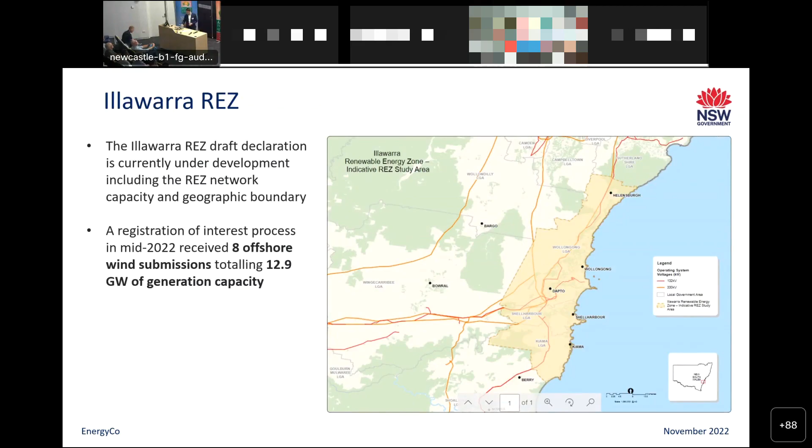So this slide is all about why I'm saying the Hunter and the Illawarra are ideal for offshore wind, really delving into why that is the case. You can see there are a few points here. There are renewable energy zones in both regions, and I'll delve into that a little bit deeper in a moment as to why that's a beneficial thing.

There's proximity to high voltage connection points. Richard will delve a little bit more into this in his presentation, but essentially you need those high voltage connection points to connect projects of this scale.

There are deep water ports here. That's really, really important when you think about the assembly of these projects, the construction of these projects, and how that works.

This goes for the Illawarra, but it's probably a bit more applicable for the Hunter. There's an existing skilled workforce here that needs to transition away from carbon intensive industries to new industries, and offshore wind is one of those things that could actually produce thousands of jobs. There's the potential there, even for a single project during construction, to produce thousands of jobs. So that's a really important point to make.

And just finally, the last point there circles back to what it is to be in a renewable energy zone. I won't go into that because I don't really have enough time, but essentially renewable energy projects that connect within renewable energy zones have a number of benefits. It's easier for them to actually access the grid, there are some financial support mechanisms there, and potentially some shared connection assets as well.

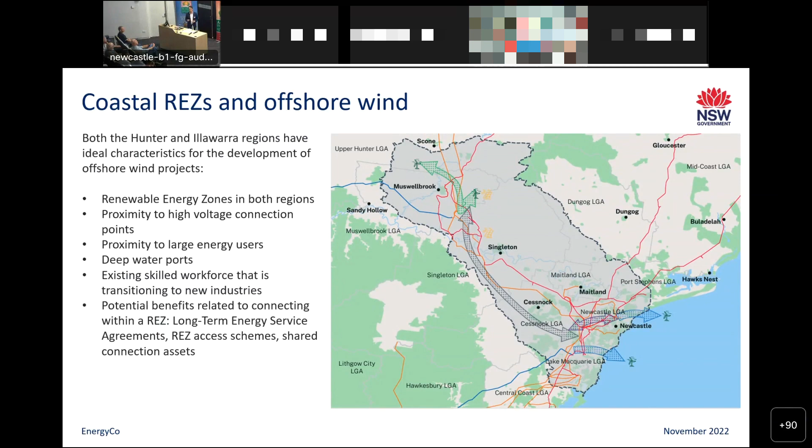So we know why these regions are ideal for offshore wind, but why is this good for us as a state? Why is this good for us as consumers of electricity?

The top point here, I find that wording a bit hard to understand, but leveraging high capacity offshore wind resources with time diversity. Essentially, the way I'd explain that is when the wind's blowing offshore and producing power for a theoretical offshore wind plant, it's not necessarily blowing onshore, and vice versa. So they produce energy at different times, and that's really, really important when you have lots of different intermittent sources of energy. Obviously solar is part of that as well.

Consumer price benefits due to greater resource diversity. Obviously, the core of any program to replace coal-fired generation is to deliver cheap energy for everybody. That's not only important for homes, but it's really important for businesses as well. If we have more diversity, we need less storage—that's basically what it comes down to. If we have energy producing at different times of the day, we don't need to overspend on a lot of storage, which is a very expensive part of the energy transition.

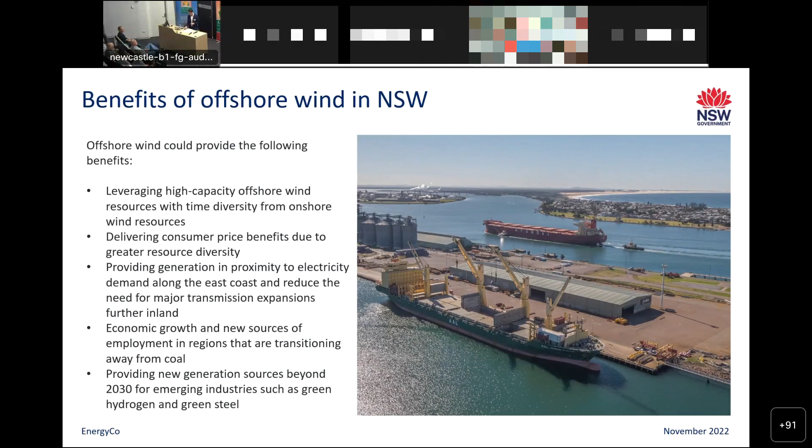This is the legislation section, so I'll try to make this as quick as possible. The piece of legislation that will actually allow these projects to be built is called the Offshore Electricity Infrastructure Act 2021. It's a bit of a mouthful.

That was passed last year, and now the federal government is in a process of identifying areas or zones in which the turbines can be constructed. So it's quite similar to the process with a renewable energy zone: you identify an area where projects can be built, and then developers can apply for licenses within that area.

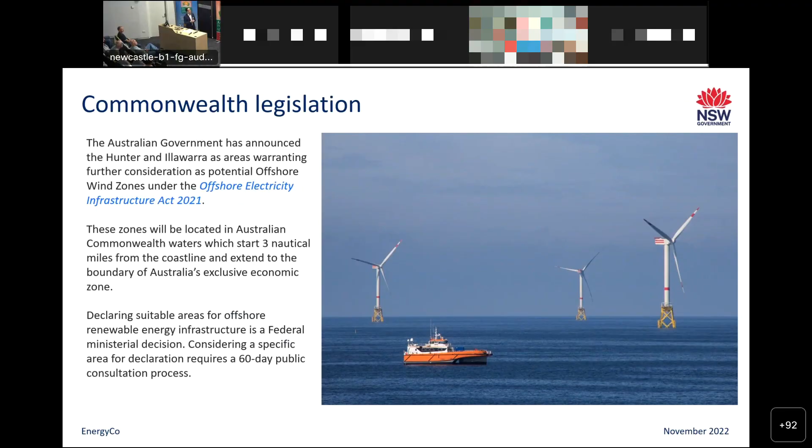I guess the only other thing to say is that's a federal ministerial decision. At the moment, that's Chris Bowen, so that would be sitting under his portfolio. And there needs to be a 60-day public consultation before any declaration takes place.

This is a very dense slide, so apologies for that, and it's a pretty intense flow diagram there on the right. I won't say much about this, and these slides will be sent around later, so you can delve into this if you're really into legislation and regulations. But the important part I'll use...

Essentially, when developers apply for licenses within this area, there'll be an assessment of the technical capability, financial capability, and suitability of a project. So projects will have to go through a competitive process to be allocated a license. And that all sits with the federal government, as these turbines are installed in Commonwealth waters.

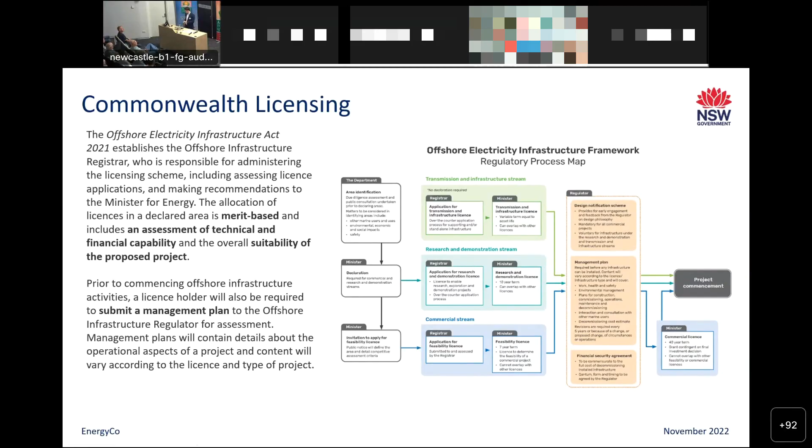Just very quickly, I wanted to touch on Victoria. They've been fairly quick out of the gates with offshore wind, and some of you might have heard about the Star of the South project. That's essentially the front runner across the country in terms of offshore wind.

Victoria released a policy directions paper in March of this year - that's where the snaps come from on the right. They set targets and identified zones where offshore wind was likely to take place. They've looked at some fairly large numbers: 2 gigawatts by 2032, 4 gigawatts by 2035, and 9 gigawatts by 2040.

So really big aspirational targets by Victoria, looking at some of those zones. They then followed that up with probably the more interesting document, an implementation statement, in October - so that's quite recent.

That actually took a step down in terms of detail, looking at what the government needs to do to facilitate these projects. So they've set the big aspirational target, and this implementation statement looks at more of the nitty-gritty detail. That's why I say it's a bit more interesting.

There's a number of things there, but I think the most important are the top two. Victoria has chosen to go with the government having a role in coordinating transmission - meaning high voltage lines coming onshore and connecting to the grid. That can be a very difficult and contentious process, with a lot of impacts on communities onshore.

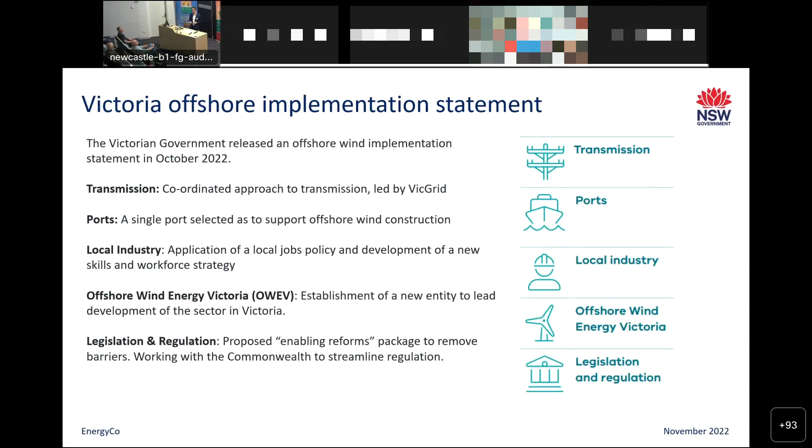Victoria is likely to have mostly fixed bottom offshore wind turbines. That means they're literally fixed into the seabed at relatively shallow water depths. That kind of technology is pretty well proven worldwide and has been rolled out extensively in the North Sea and other areas in Europe.

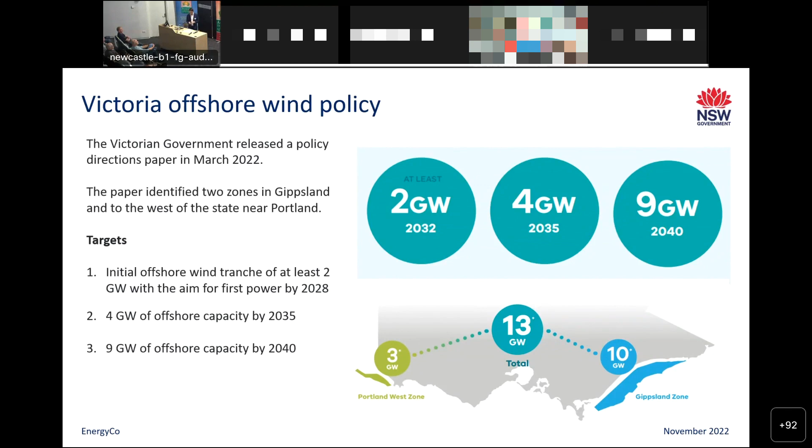Let's see if this works. Essentially this is a video of an offshore wind installation in Europe. There's not a huge amount of operational floating offshore wind projects out there, and this is one. This video, and Richard's got a few as well, shows you the scale of these projects - remember this is a few turbines, but a single project here in Newcastle could have 50, 100, even more turbines. So just think about the multiplying effect there.

I might turn the music down because it's a bit...

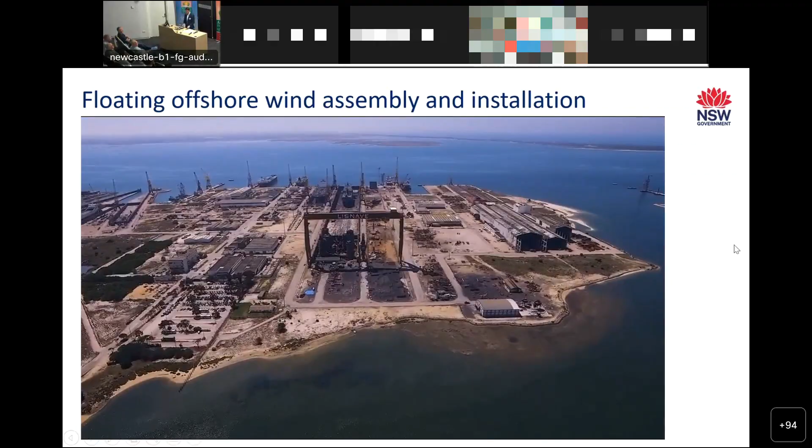Skip past all this. This is a new way of generating energy and an important step to fight against climate change. Portugal enters a new era with an internationally acclaimed solution in the production of offshore renewable energy.

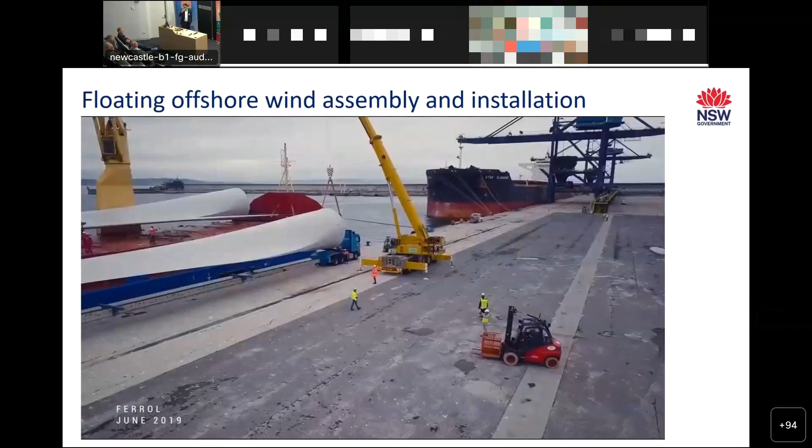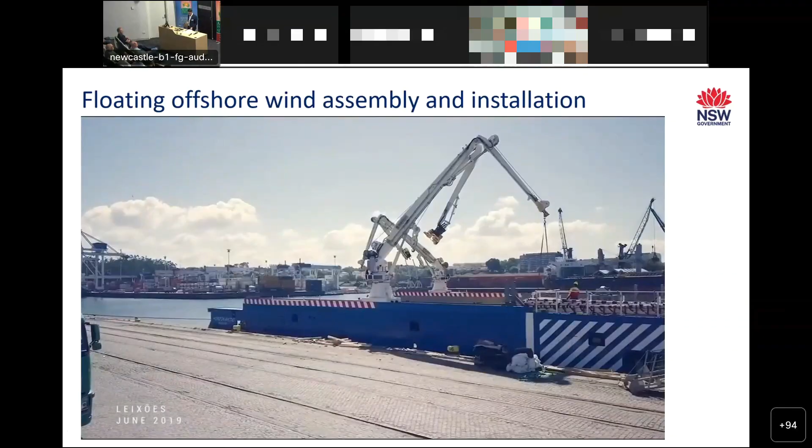The Windfloat Atlantic project, formed by Ocean Winds, Repsol and Principal Power, is the first floating wind farm in continental Europe, just off the coast of Viana do Castelo.

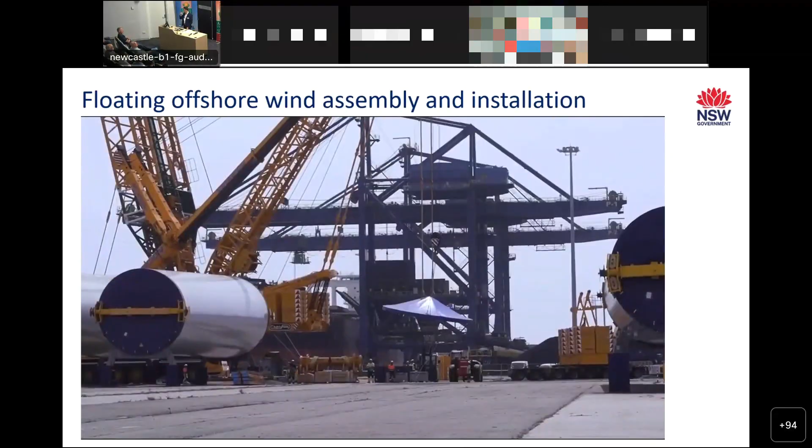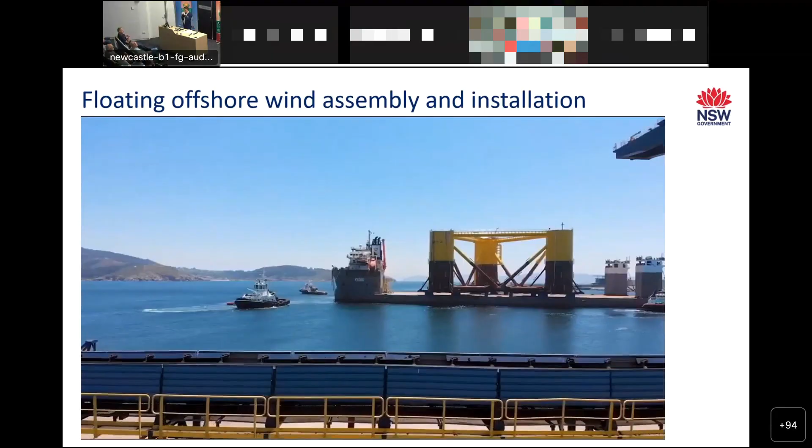This floating wind farm will allow the optimization of natural resources and will speed up the commercial deployment of this innovative technology. Windfloat Atlantic is an example of a more sustainable future for mankind, with the largest turbines ever installed on floating platforms.

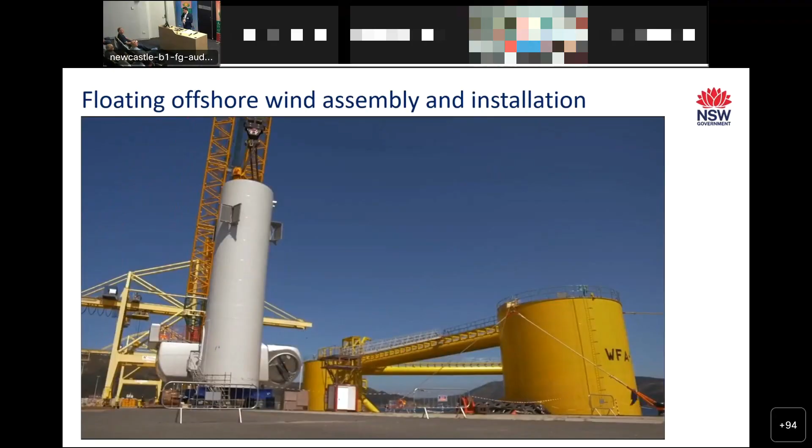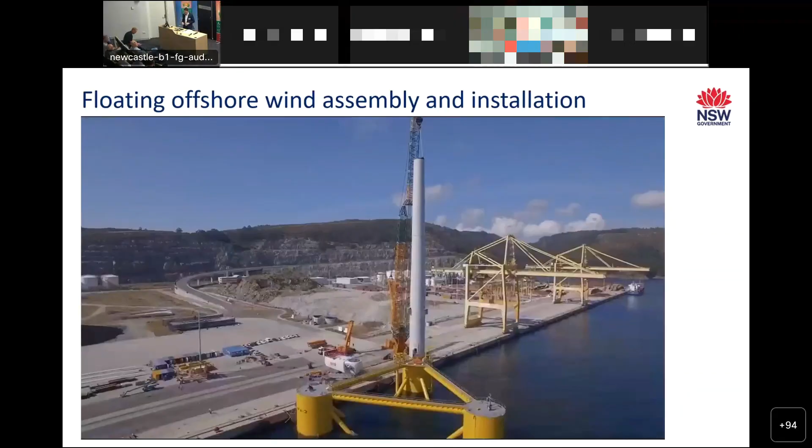The total installed capacity of 25 megawatts will provide sufficient energy to 60,000 people throughout the year. This energy promises an endless source. The potential of wind is immense, and this renewable energy is an essential part of the worldwide decarbonization strategy, free of CO2 emissions. The Windfloat Atlantic project is the future we envision.

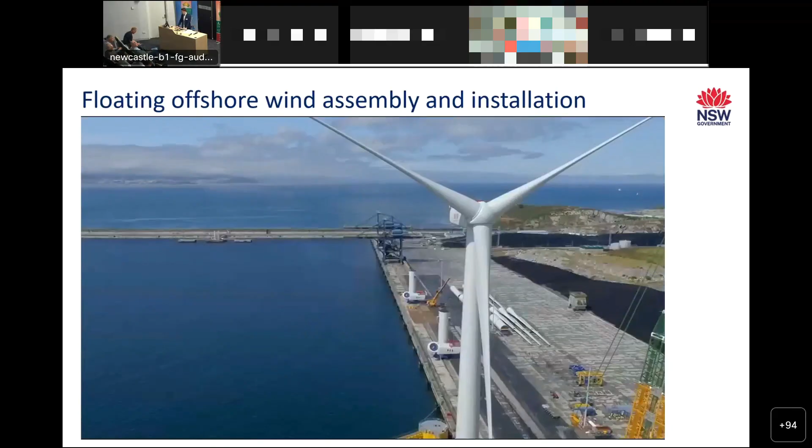Our mission has begun, and we will continue to nurture the power of nature to make our planet more sustainable. This is the beginning of a new era committed to enabling a better future.

Windfloat Atlantic. Energy beyond the horizon.

Pause it there. I apologize for the aspirational music in that video - it's a bit cheesy, isn't it?

So just to stay on that theme of floating versus fixed for a moment, as I mentioned, the fixed offshore wind industry is fairly well established worldwide. The technology's there, the skills are there, and there's a lot of very large operational projects already out there. Floating offshore wind, which is what you just saw in that video with the platforms literally floating out at sea, is a little bit earlier in its development as an industry.

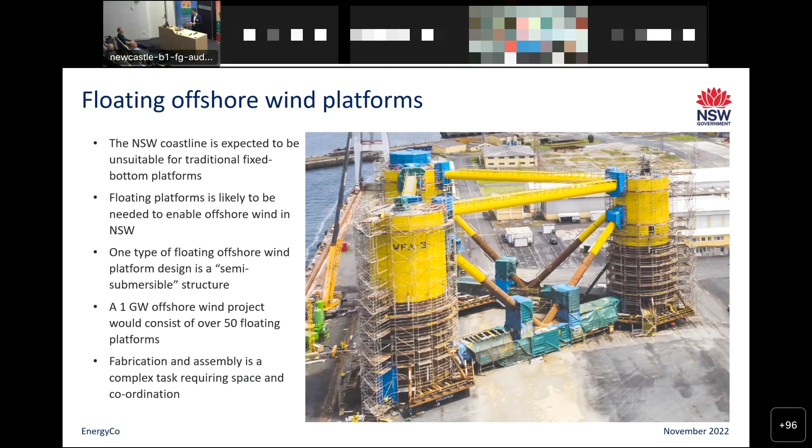Supply chain is something that people talk about a lot with offshore wind, and that's obvious when you just look at that piece of infrastructure. There's obviously a lot of things that go into that - steel and concrete and various other things. But there's also lots of other things: the array cables that actually carry the electricity, potentially offshore substations, mooring systems, and all the vessels that go into construction and maintenance.

There's so many opportunities there for the Hunter, if even one of these projects manages to get constructed, for lots of jobs that go around the project as well as directly for the project.

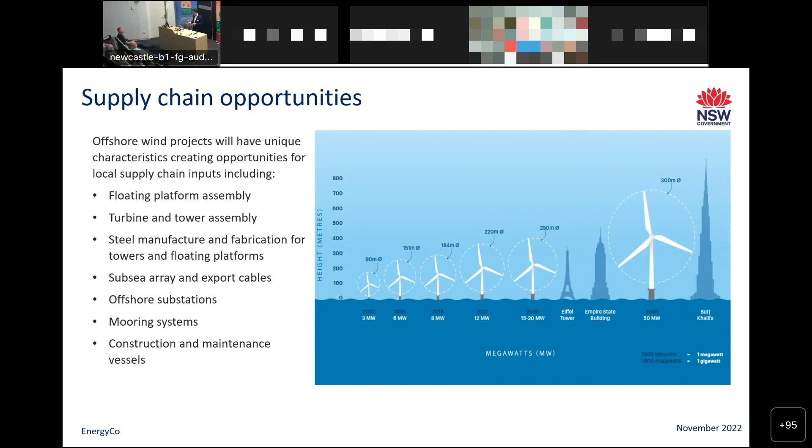Cost is always something that people bring up for offshore wind, and I know Richard's going to cover this as well. Obviously, as I mentioned, when you're talking about energy, always the first objective is reliability and affordability. That has to be the main things that you look at. So although all this renewable energy is sustainable as well, the most important things are reliability and affordability.

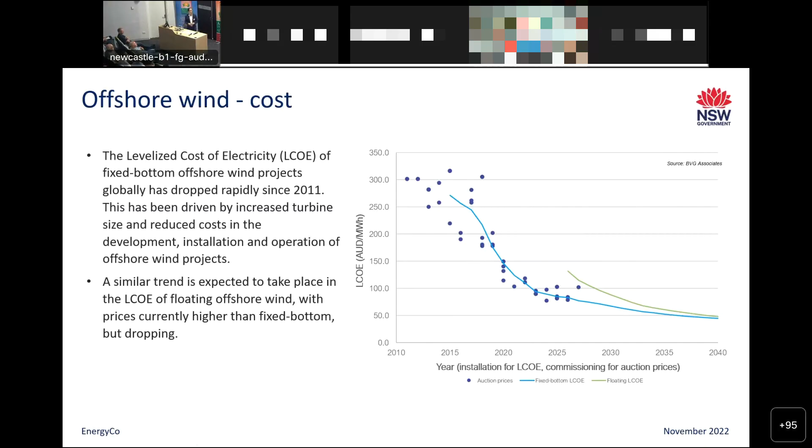Hydrogen is obviously something people talk about a lot, and I see a lot of parallels between hydrogen and offshore wind. They're both emerging industries. There's both not a lot of actual operational projects in Australia to go and look at and to see how they work in practice. But the Hunter and the Illawarra have both been selected as hydrogen hubs by the New South Wales State Government through the hydrogen strategy. And you can see here, these are the shortlisted projects for funding through the Hydrogen Hubs program. And you can see where they're clustered. They're clustered around the port, essentially, and down around Port Kembla in the Illawarra. So there's a lot of alignment between renewable energy zones, offshore wind, and green hydrogen.

And there's a lot of complementary aspects to hydrogen and offshore wind. Hydrogen, if it takes off at scale, will be a huge consumer of energy. Offshore wind will be a huge producer of energy, and they're both essentially in the same location. It's pretty simple, really. Those two industries could fuel one another going into the 2030s. There is the potential for that.

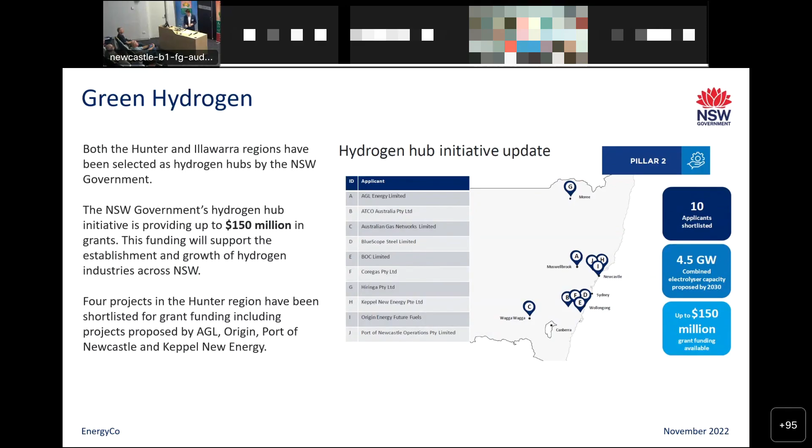I think this is my last slide. So this is tying it all back to EnergyCo and what's our response to the development of an offshore wind industry. If we go back a couple of years ago, offshore wind wasn't really in the thoughts of policymakers in New South Wales. It was more about onshore, and that was the accepted technology, and that was the safe bet, and that's what people went with. What we've seen over the past 6 to 12 months is a big change of tack, and that's been driven by a lot of interest coming to us through those registrations of interest and other approaches, and a knowledge that globally this floating offshore wind market is taking off. So it's a really good moment for New South Wales to take advantage of that.

So EnergyCo, that's who I work for, we've been engaging pretty closely with the federal government around those potential areas in the Hunter and the Illawarra. That's been probably our most important role to date. We've engaged a consultant to conduct research on the opportunities and challenges. That's obviously very broad language, but it's just looking at how would offshore wind work here and what are the things that we need to consider as a government. And we've also engaged with a number of state government agencies on what do we need to consider for an offshore wind industry in New South Wales.

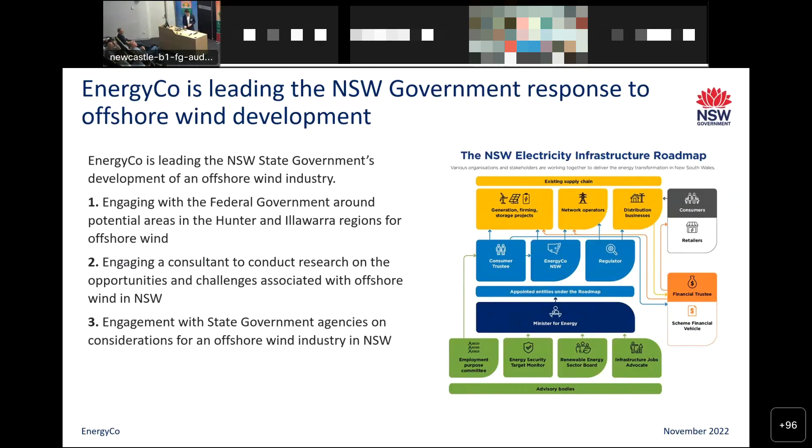There's obviously a lot of things that we need to look at, whether it's visual impact for turbines being near the coastline, or migratory birds, or native title. Or there's a lot of different things that we need to consider, which we are in the process of collating that information at the moment. And I believe that's my last slide.

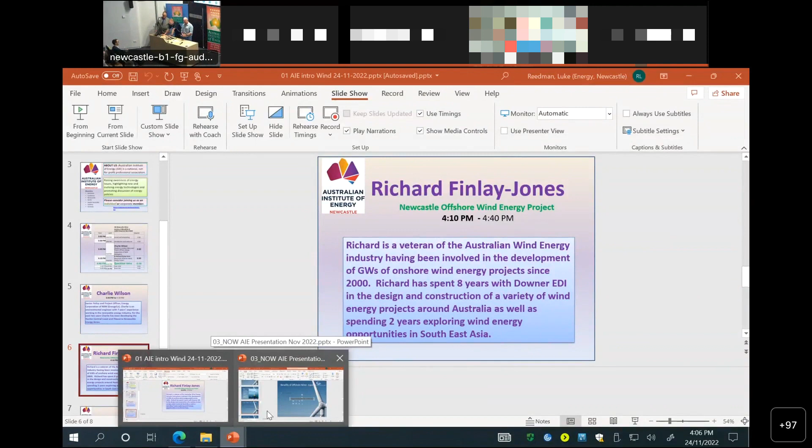I should see if I could work the technology first. Those people who are on the webinar, can you hear this? Are there any thumbs up? Yep. Yeah. G'day, Fifi. Thanks, mate.

So just by way of introduction, I'd really like to thank the Institute of Energy. I'm a fellow of the Institute. Nigel didn't know that. Thank you very much for the opportunity to speak today. Thank you also to CSIRO for the use of the facilities, and congratulations on the CSIRO report that just came out yesterday, which was fantastic but frightening, the impacts of climate change. Have a look at that if you're doing your homework. I'll just see if I can make this work.

Yep. So I'm part of the Newcastle Offshore Wind team. I'd like to acknowledge the traditional owners, the Worimi and the Awabakal people. Thanks again to the Institute, and thanks CSIRO, and thanks everybody for coming along today to listen to this. We've actually been flying under the radar a bit compared to some of the other developers. That's been deliberate. That's because we're broke. We don't have any money, but we're hopefully going to change that situation fairly swiftly.

But yeah, I wanted to give you an introduction to a bit of wind energy, talk a little bit about onshore. We'll do a bit of Wind 101, and then we'll move into the offshore, some of the trends that have been happening overseas, and then have a look at the floating offshore opportunities. Look at offshore wind in Australia, because there's a lot of offshore wind that's proposed for our country, and then look at New South Wales. We'll drill down, and then I can do my pitch on our little project. How does that sound? So, Wind 101, parts of the wind turbine.

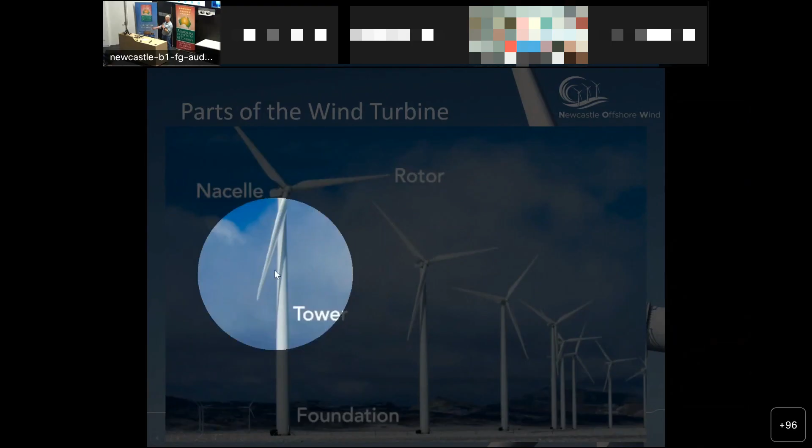Let me see if I can work Charlie's fantastic device. There we go. So, that's a blade. The 3 blades make up the rotor. The generation part of the turbine is called the nacelle. That houses the gearbox and all the machinery. That little part there is called the hub. That's the tower. And the power runs from, well, I think the next slide describes how a wind turbine works.

The blades catch the wind and they turn. The generator converts mechanical energy into electricity. There's an induction generator in there, or a permanent magnet drive that drives the power down. At the bottom of the turbine, there's either a kiosk inverter or a transformer that converts it from relatively low voltage to high voltage, usually 33 or 66 kV.

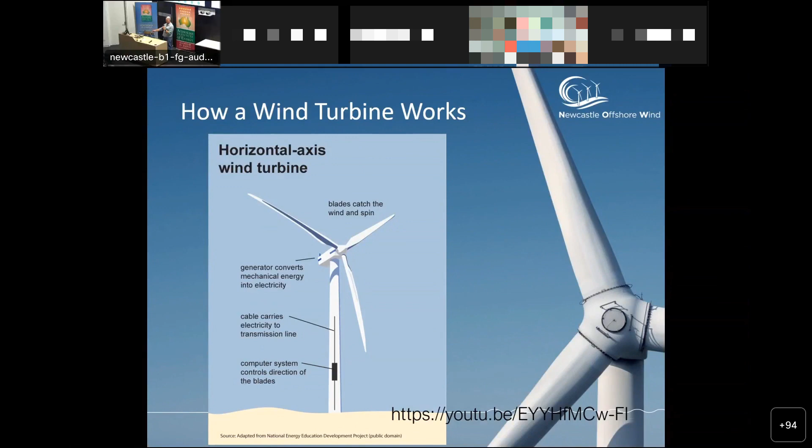And then for onshore wind, it goes underground, and there are strings of turbines connected to collector stations. The collector stations then go to a substation. The substation then connects to the grid, usually. Hope that makes sense.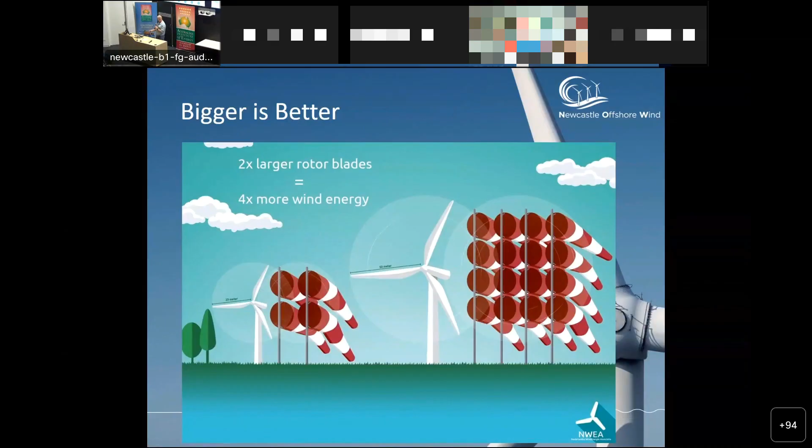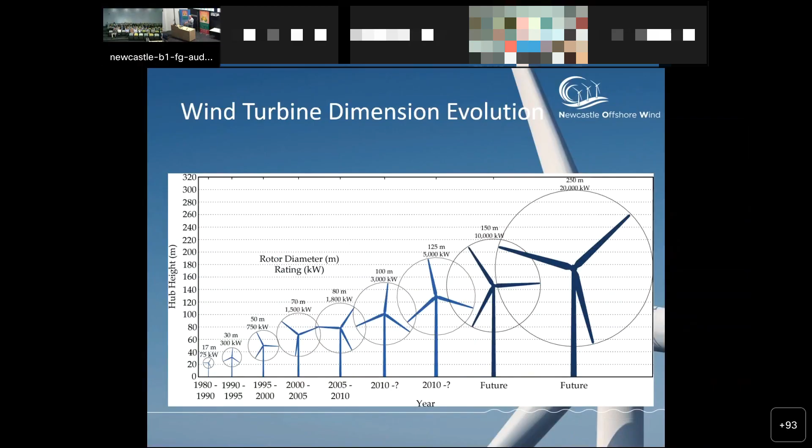And that's a similar slide to the one Charlie showed, which shows the evolution of turbines back in the 80s, back in the day. That size there was the size of our Kooragang wind turbine that we used to have. Sorry, I'm not holding that well at all. That size there. And we're now looking at 6 megawatt, 7 megawatt platforms for onshore wind currently. And this is the future. This is what we're looking at now. 20 megawatt turbines. And there's already a project in Portugal that's looking at 20 megawatt floating foundations.

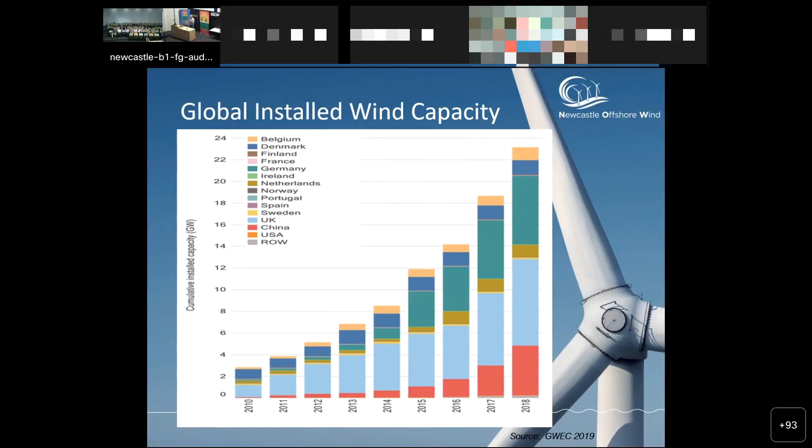We'll get to that. This is a pretty old graph. You can see it's 2018. It shows it's focusing on the EU. There's a China figure there, and that's the one I wanted to really focus on. But this shows the growth of, this is the global installed wind capacity. So that's onshore and offshore combined for all those countries. I think you can see the growth in the wind industry.

And then if we go to the next slide, this shows what's happening in offshore wind. So here you have on the y-axis the cumulative installed onshore capacity in gigawatts, and that's 2010 going up to 2019, and that's broken up into countries again. What's interesting about these slides is that there's no mention of China. You can see the second graph is the cumulative installed offshore wind capacity, and most of that would be bottom fixed.

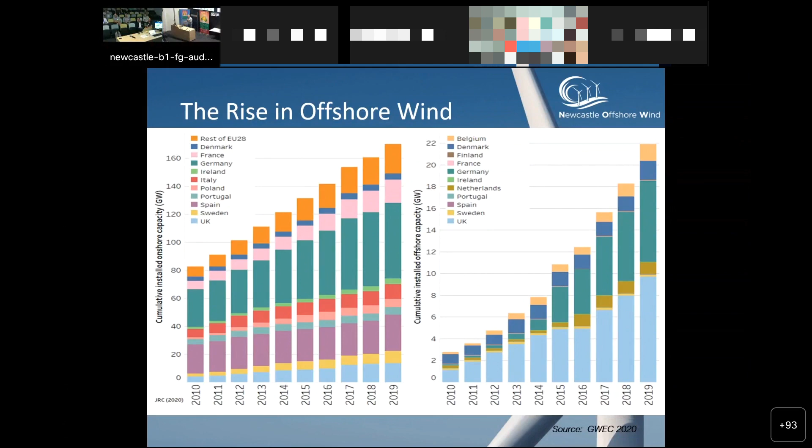So this is a slide that I just grabbed off the net from the Global Wind Energy Council, who collate all the statistics and data from the Global Wind Energy source. And so what that's showing is the gradual rise in offshore wind over time from 2017 going up to 2021. The green is onshore, and the blue little section up the top there is offshore.

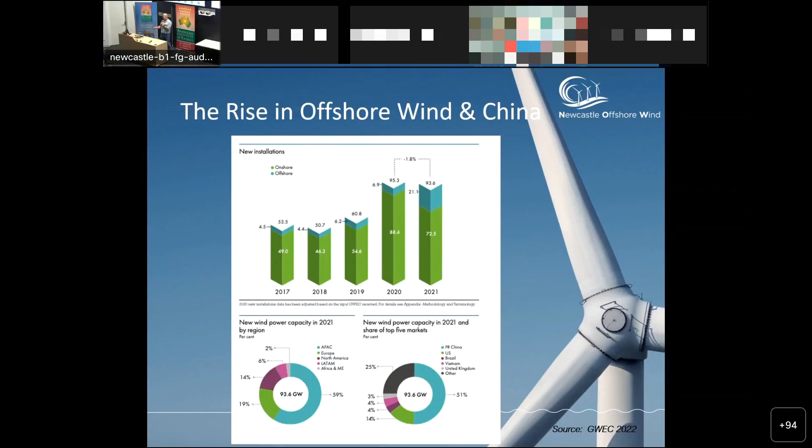And this graph here is showing new wind power capacity in 2021 by region. So you can see that APAC is 59% of the new wind power capacity in 2021. And the top 5 markets in 2021 is that third graph in the corner, and 51% of that is the People's Republic of China. So China has installed more wind energy than all the other countries combined in the last year.

Social impact of wind energy is the most difficult part of any wind energy project in Australia at the moment. Social licence to operate is extremely difficult, and it's getting harder every day. So offshore is getting more attractive to developers like me.

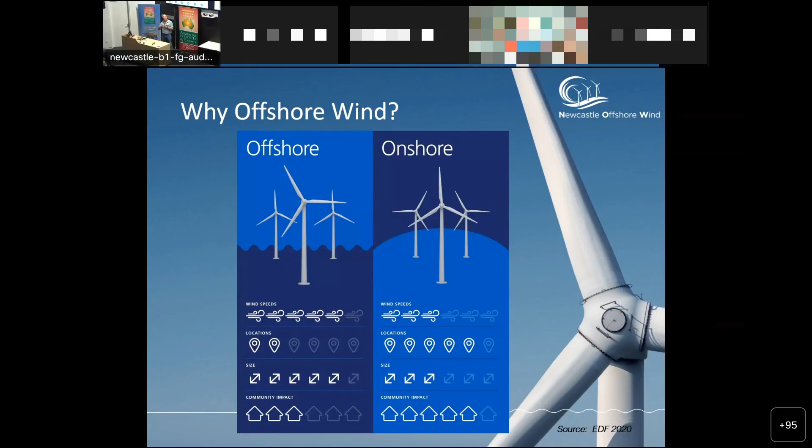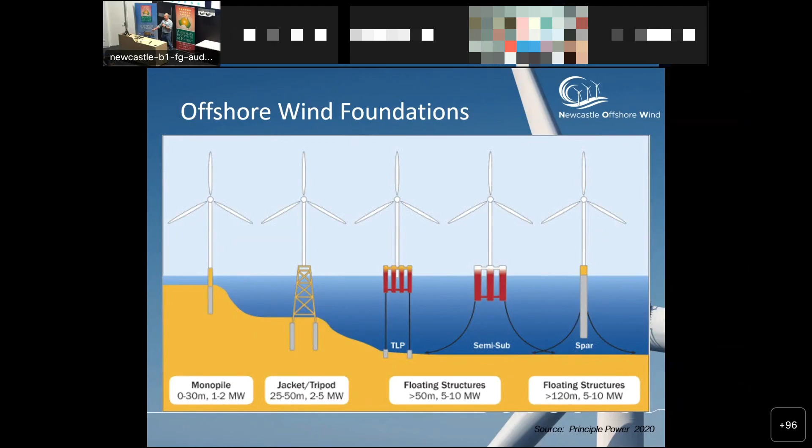They're about 300 tonnes each. Here's a little case study. I don't expect you to read that, but the essential is that in the EU and all around the world now, they are looking at purpose-developed ports for the construction of offshore and particularly floating offshore wind foundations and turbine manufacture.

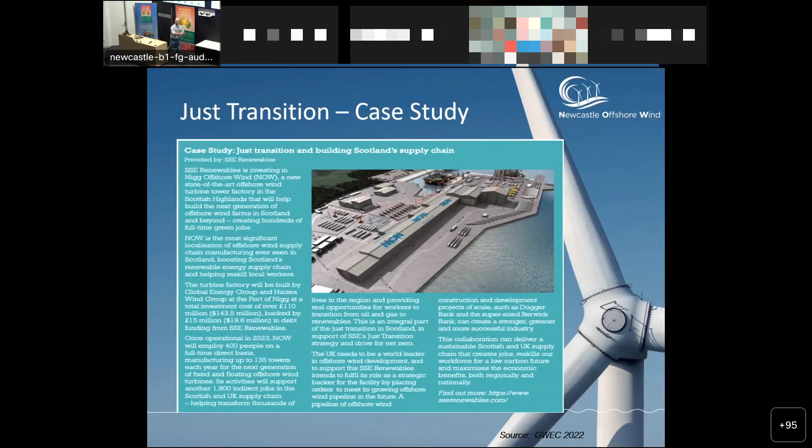So the ideal situation for us, I believe, would be an integrated manufacturing facility for the Port of Newcastle, where we have a supply chain that builds the foundation components, and then as it's walking along the port, if you like, the turbine gets placed on it. So it starts off on land, the floating foundation moves into the port, into the ocean, and then you build the turbine on top of that, and then it gets floated out as a single unit. And that's what's happening in other parts of the world.

I don't think we need to show this after Charlie's great video, so thanks Charlie for that. Got me off the hook.

So Charlie was talking about the floating offshore wind proposals that are out there. This is a bit dated, so some of these have actually gone ahead. The Hywind Scotland project is actually working now. The WindFloat Atlantic project was the one that Charlie showed on the video. A lot of these other ones are proposed, and the Hywind Tampen project down the bottom in Norway has already commenced. They've got the first few turbines out there in the ocean now, and as of a few weeks ago, they're actually supplying power to gas and oil plants out in the North Sea. The Kincardine one has also started. It's gone ahead, but the others are all proposed.

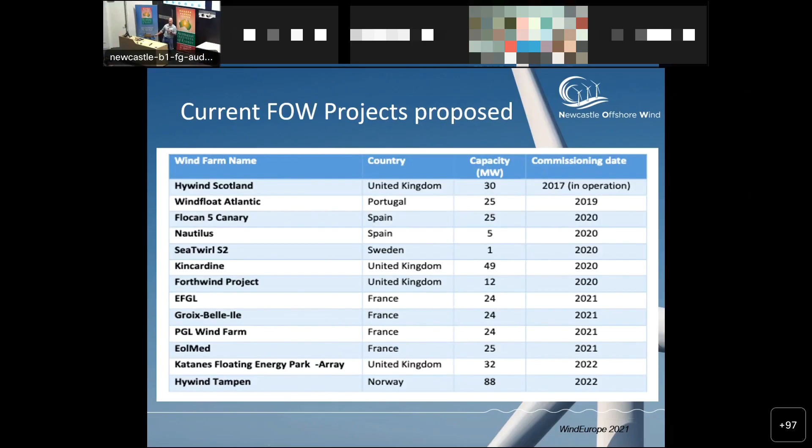So there's a really strong pipeline of potentially pilot projects. But behind that, you saw from Charlie's graph the commitments to offshore wind from all the countries around the world because of the large areas of ocean, because of the good wind resource, because of the ability to do things at scale and drag the power back to the land. They're the drivers of this.

And I was reading an article in the last few days that said even if we install all of the offshore wind that is proposed with all the targets, we still won't meet our climate objectives. Unfortunately, we still won't meet what we need to do. So we've got to work a lot harder, people.

Here's a case study of the Hywind Scotland project. And we were talking about scale before. Each blade of the turbines is similar in length to an Airbus A380 wingspan. That's 80 metres. The expectation is that these blades will get to 100 metres. GE already has a two-piece blade for onshore wind. It's probably not going to be necessary for offshore wind, but we have a representative from CWP who have just installed the Bango wind project down Yass way, and that has two-part blades. It's the first two-part blade project in Australia.

Congratulations, Egan.

So this is talking about 800 metres depth for these turbines and electricity to 20,000 homes, reducing the carbon emissions by 63,000 tonnes. And it's 25 k's off the coast of Scotland, which is about the same distance that we're talking about for Newcastle.

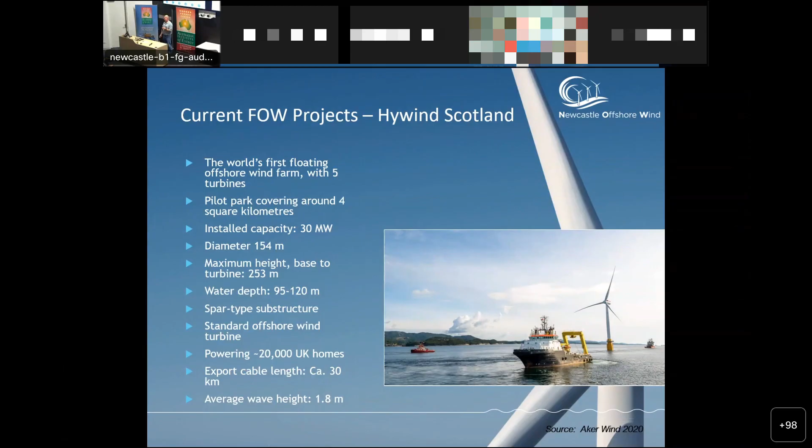30k export cable back to the land. This is interesting. This shows how the mooring might work. So the numbers there show the turbines. Sorry. So each of those is a turbine. This is an aerial view. These are the moorings. So you have 3 mooring lines with the anchors. These are the anchors here. These are the electrical lines combining the turbine. So the electricity runs like that.

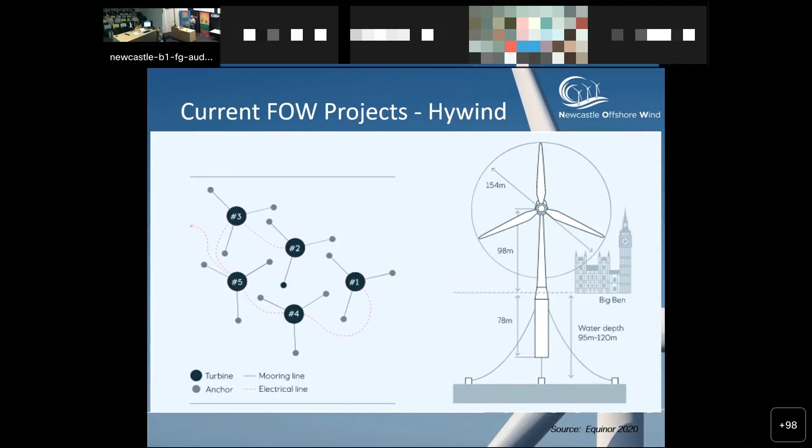And then what they're toying with now is having the anchors shared. To reduce the cost, have shared anchors across the array. And that will drive the price down. But what it might mean is bigger anchors. So there's a cost benefit that might happen. And once again, that shows the size of the turbines. They're only getting bigger. A bit of a discussion about Kincardine there. You can read about this a bit later on.

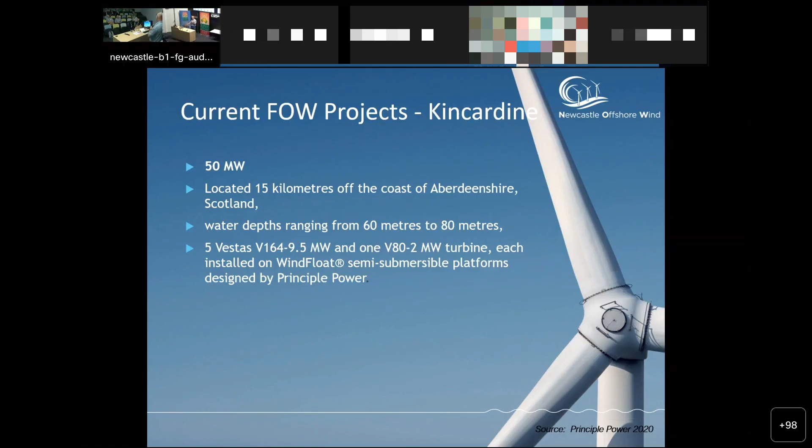There's another shot of the semi-submersible. So this is interesting. This is a WindFloat. This is a piece of WindFloat technology, which is proprietary information. It has permanent water ballast to lower the platform. So as it fills up with water, it sinks. Has a smart hull trim system, which moves the water from the column to compensate for mean turbine thrust load.

So if you think about an offshore wind turbine, it's got the worst of everything. You've got your turbine sitting there, the wind striking the turbine, forcing the load this way. You've got your foundation saying, no, we want to push you that way. You've got the ability for the turbine to nod its head, to yaw towards the wind. And at the same time, you've got the ballast in the foundations trying to juggle all these forces. On top of that, you have a swell, potentially, and you may also have a current underneath.

So you have all of these forces that the wind industry is not experienced with, but the gas and oil industry is. So we're bringing these two pieces of technology together, not in the way they were necessarily designed to do. We designed wind turbines to be sitting on the land, not on some rocky barge. So there's a whole lot of technology happening and controllers, and even the cables now have dynamic flexes in them and floats to reduce the amount of bend and drag and improve the ability for that whole system to remain stable, which I think is really exciting, because I'm a mad surfer and I just don't know how they do this. It's crazy. It's fantastic.

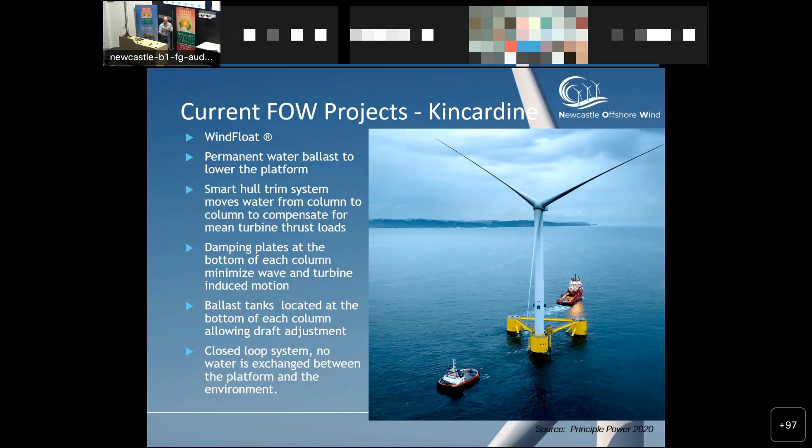But there's a lot of proprietary information in this, and all the smarties are now looking at how they keep the floating foundation as stable as possible in the worst possible conditions, like the storms in the North Sea. I reckon it's wonderful.

We were talking about levelized cost of electricity or levelized cost of energy, LCOE forecasts. And here's a graph showing the forecasts of the price of wind, onshore, fixed bottom offshore and floating offshore, and how they're going to fall. It's a little bit difficult to read at first, but what's happening here is we're looking at the reduction in the baseline cost as of 2014. So that line there,

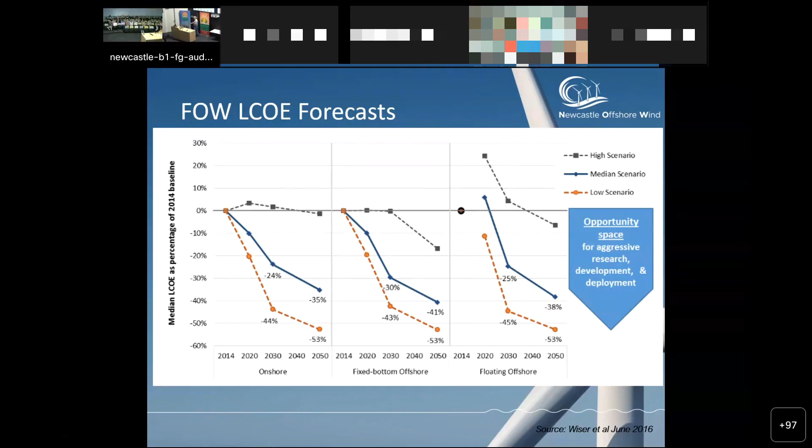2050, maybe sooner. So that's not dissimilar to the graph that Charlie showed - the levelized cost of energy, comparing bottom fixed and floating, and the total investment cost. We're still sitting at about double the cost, if not more, depending on the project, the location, and the ocean depth. There's lots to do, but plenty of drivers for us to do this. It's very exciting.

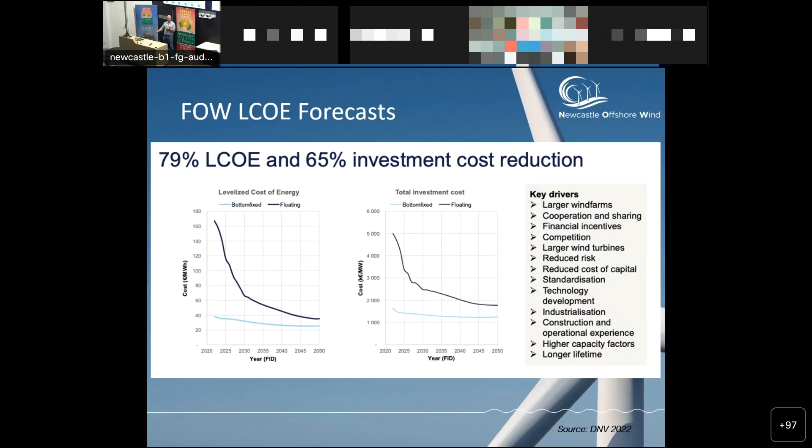So there's projects proposed for all around Australia. Charlie mentioned that the majority of the projects in New South Wales will need to be floating because the continental shelf is so far out. We don't want to see these things.

I can tell you a story, it won't take too long. We had a turbine here in Newcastle called the Kooragang turbine. It was a 600 kilowatt turbine, and it was fantastic because it stopped everyone in Newcastle being frightened of wind. It was such a great little turbine - you could drive past it, you could stand under it. You weren't going to grow another head, it wasn't going to stop your sheep from producing wool, it wasn't going to stop your cows, it wasn't going to stop your chooks from laying eggs. Don't worry, I've heard them all.

But it went away, and we've got two representatives here from the Clean Energy Association of Newcastle and Surrounds - our local community renewable energy group. They tried to buy that turbine unsuccessfully, but had a good crack to keep it in Newcastle. Unfortunately they failed - they were outbid by a Tasmanian chook farmer who took the turbine down to Tasmania to help generate power for his other two turbines already on site. He knew a bargain when he saw it and he took it. But now we know we didn't have anything.

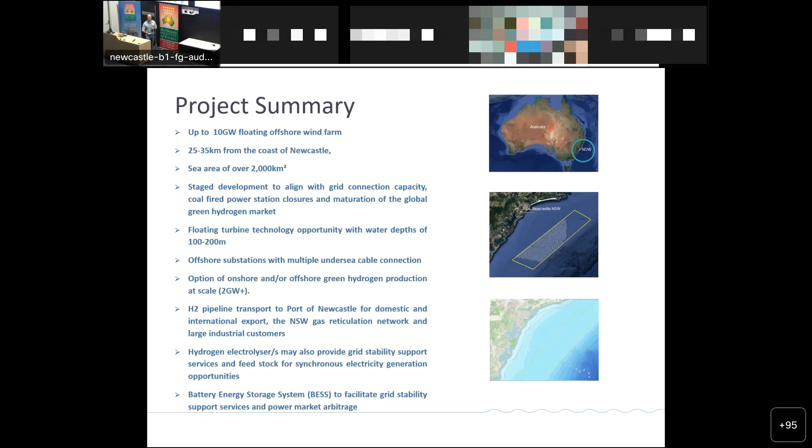As Charlie mentioned, the goal is to potentially have this powering hydrogen facilities so that we can replace our coal exports with another energy export called hydrogen. The other benefit of hydrogen is we can use it for local grid stability and for local loads. There's an existing gas market, and even though hydrogen has only recently become sexy, there's been an old hydrogen market for many, many years.

It's possible that on a clear day you would be able to see the tips of the rotors. On a hazy day, you're not going to see this thing. You're not going to see any turbines. On a cloudy day, on a rainy day, you're not going to see it. But on a clear day, you will probably see the tips of the rotors, depending on how high you are—the higher up you go, the more you'll see.

We talked about transmission connection options. Now, this is intellectual property, so I'm not going to delve into the depths of this, because this is the smarts around how we make this work. You've got to pick the best spot on the grid to send the power back in. So that's just a big map of the transgrid system.

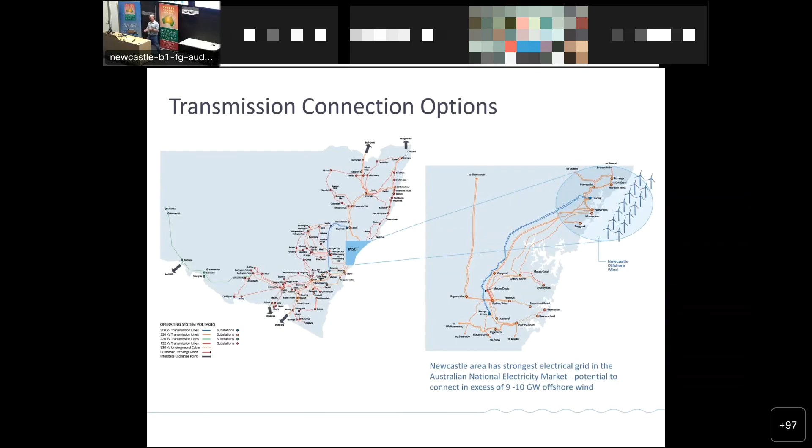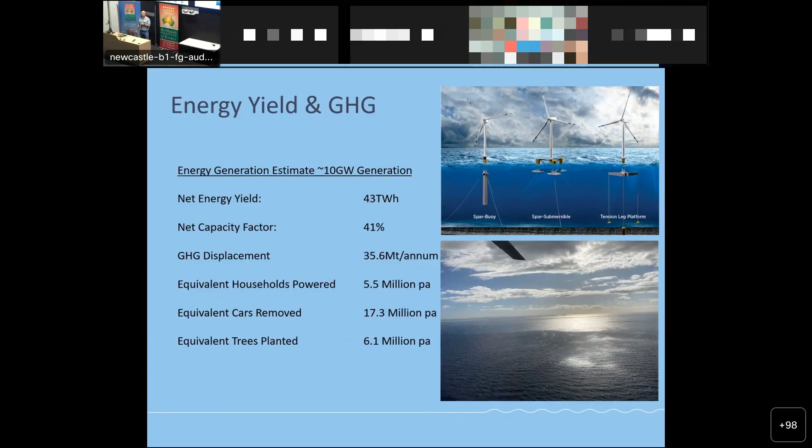So to talk about the yields and the greenhouse gas offsets, we're talking about 43 terawatt hours, net capacity factor of 41% based on the wind speed, 35.6 million tonnes per annum of greenhouse gases displaced, 5.5 million equivalent households powered, 17.3 million cars removed, or 6.1 million trees planted per annum.

There's the wind data. This is high level, and this is from not on-site wind collection—this is from desktop available data. And what it shows is that at its worst, it's in the high 7 metres per second. Now, if I saw a project 20 years ago that was an onshore wind project in the high 7s, close to 8, I would be overjoyed. Overjoyed. And the other thing it shows is that it's quite consistent.

The second graph shows the long-term wind speeds for that part of the world. So it's very consistent. That's the great thing about offshore wind—it's usually stronger, it's usually more consistent, and it usually has great laminar flow, which is what we're looking for.

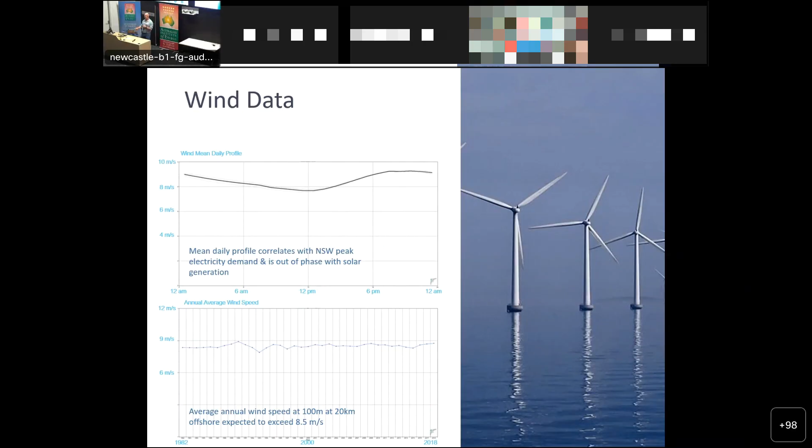So there's that photo of that facility again, and I'd like to talk just about some of the benefits that this sort of project and the other projects that are proposed could bring. It's a coal replacement transition strategy. It's complementary to the other generation happening around New South Wales. We can utilise the existing transmission infrastructure. There's a little bit of upgrading we would need to do, and obviously there's new submarine cables that would need to be brought on, but the majority of the infrastructure is there.

We have strong local loads. Tomago has been mentioned, but there's other steel production. There's the opportunity, and Sam Mellor's in the audience, for green steel production. So this is really exciting—we could be a steel town again. Imagine that, wouldn't that be fantastic? And there's other significant loads that are proposed. So the Port of Newcastle is well located for this sort of project.

Our capital investment we estimate at 25 billion. It's expected to bring 14 billion in domestic economic output and could create up to 3,000 new jobs.

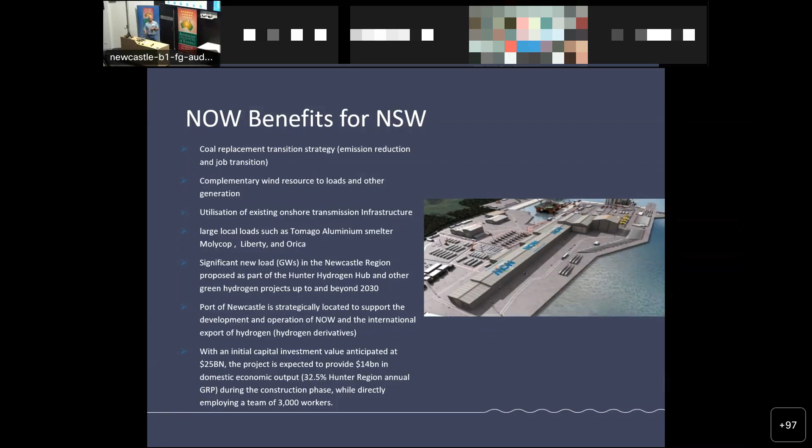The lead time on a project like this to take it to financial close is in the order of 5 to 7 years, and that's fast. I've been working on onshore wind projects that have been in the process for 20 years and still haven't gotten up. I've seen others get up more quickly. The fastest solar project I ever saw get up was in 3 years—3 years from first contact with the land to financial close.

So these projects take a long time and they're extremely expensive. I don't think there'll be too much change out of $200 million just to take it to financial close. Thanks.